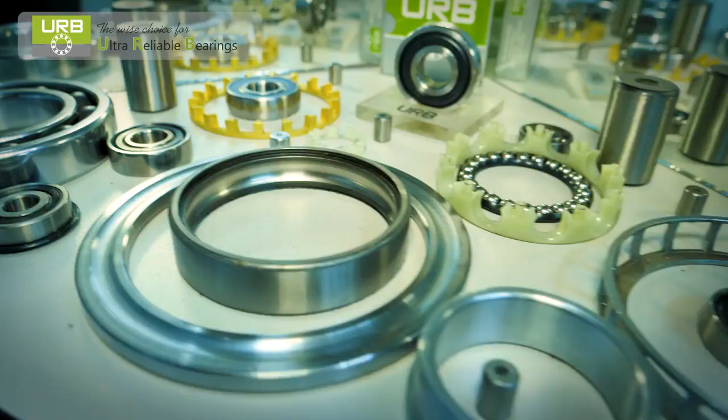Rulmenti Barlad is one of the largest manufacturers and suppliers of bearings and bearings-related services in Southeast Europe. It has over 60 years of experience in the global market and has developed a reputation for innovation and quality. The company produces and distributes a complete range of products and bearings under the URB brand.

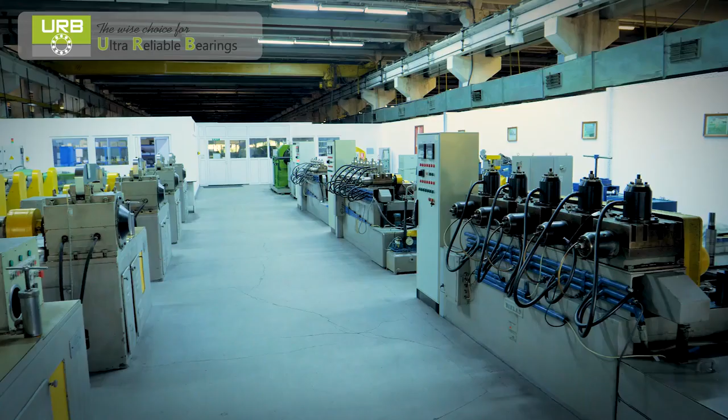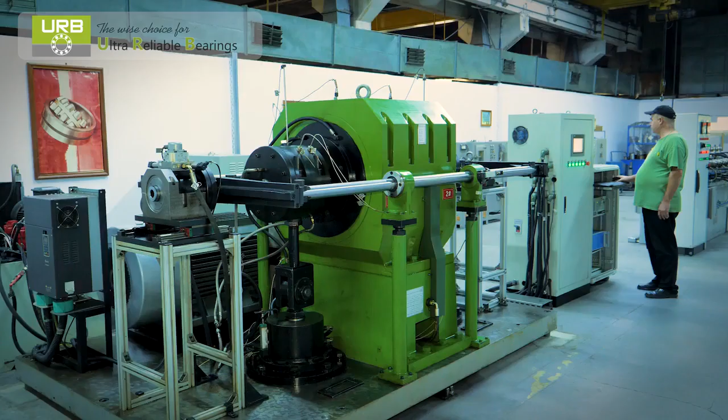The production process starts in the research and development department, where bearings are designed, analyzed, and introduced into simulation sequences with the use of various specialized software like ANSYS, MESYS, or Creo Parametric. Rulmenti Barlad also has a bearing testing laboratory that includes single post test stands and multiple post test stands in order to conduct multiple types of standard tests: durability, startup, friction, and grease loss tests.

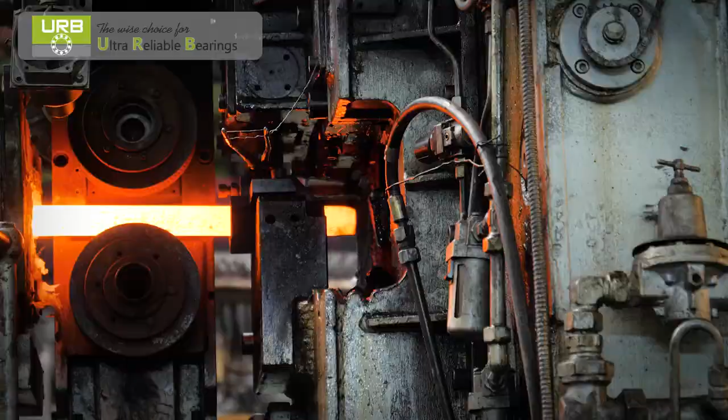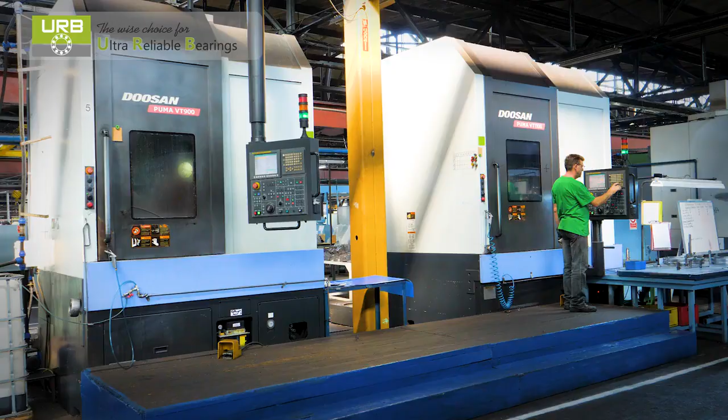The chemical composition of the raw materials and bearing components is analyzed in a dedicated laboratory. The forging process is carried out on forging lines and also on rolling mills equipment. The primary heat treatment is carried out on new and upgraded annealing lines and monitored by an advanced online system. The forged rings for the bearing components continue the process by turning operations on different types of lathes according to the design and size of rings.

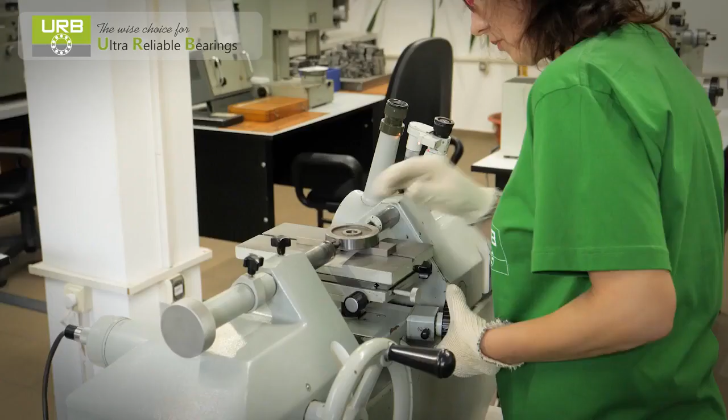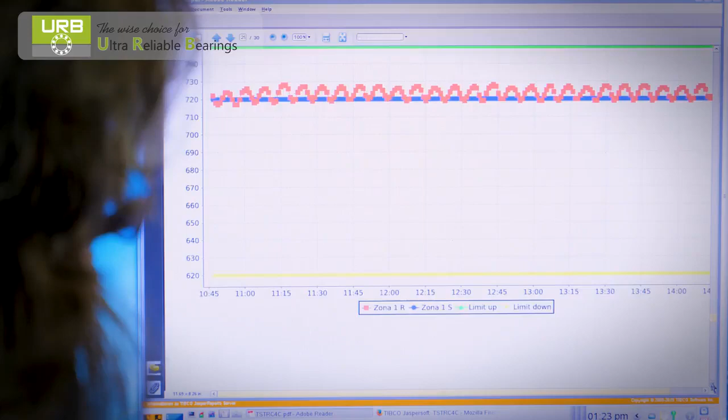Precision measurements and checks of bearing components are carried out on different equipment types: length measuring machines, industrial microscopes, and profile projectors. Secondary heat treatment is carried out on production lines with electric heating and automatic operation. Also, the line is equipped with process computers and an online monitoring system of the treatment process, which have the capability to continuously check the process parameters for each product or process part and to save and archive the data and parameters of the heat treatment process.

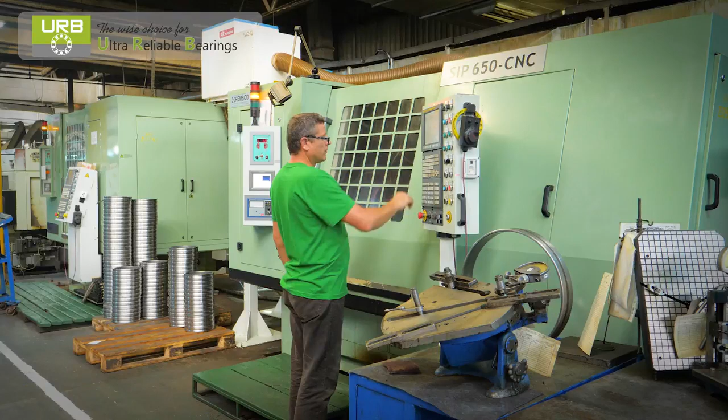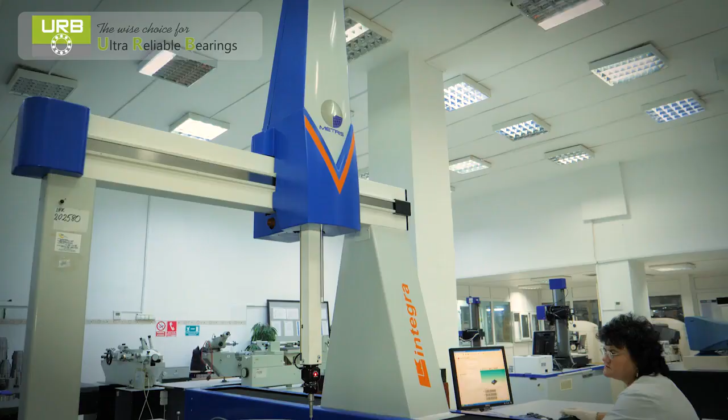The grinding process for bearing rings is carried out on lines of grinding machines or on individual CNC or modernized grinding machines equipped with in-process control devices that ensure continuous checking of the ring's parameters. The 3D coordinate measuring machines and the universal measuring machines provide high precision and accurate measurements of lengths, diameters, threads, and angles of the tested parts. Before the bearings assembly process, all bearing components are dimensionally and geometrically checked on passive control devices.

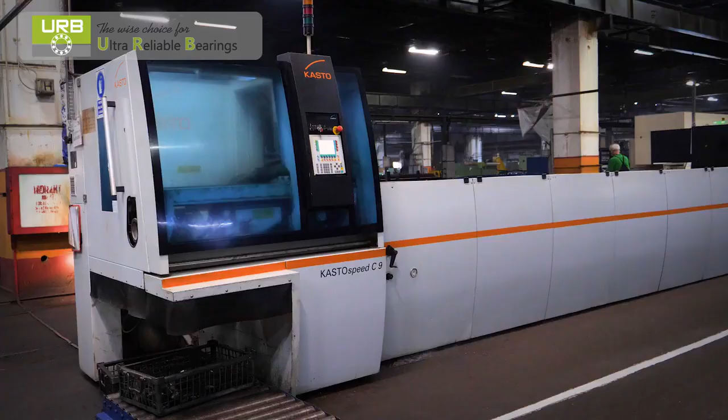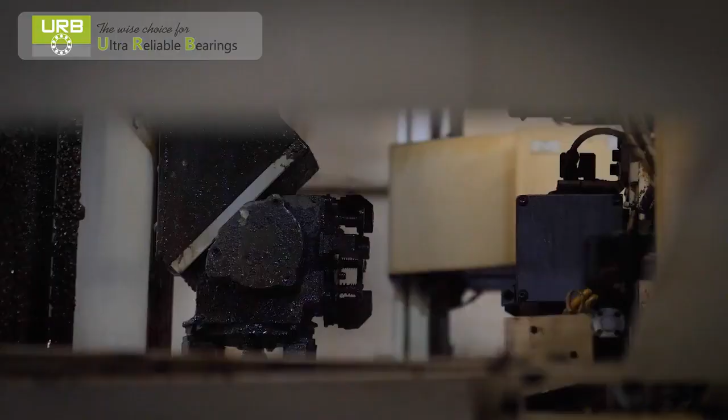The roller manufacturing process is carried out on press machines or CNC lathes and continues with grinding operations at the end sides and rolling surfaces on grinding machines simultaneously. The secondary heat treatment of the bearing rollers is carried out on upgraded hardening and tempering lines, equipped with process computers and an online monitoring system for continuous monitoring of the heat treatment process.

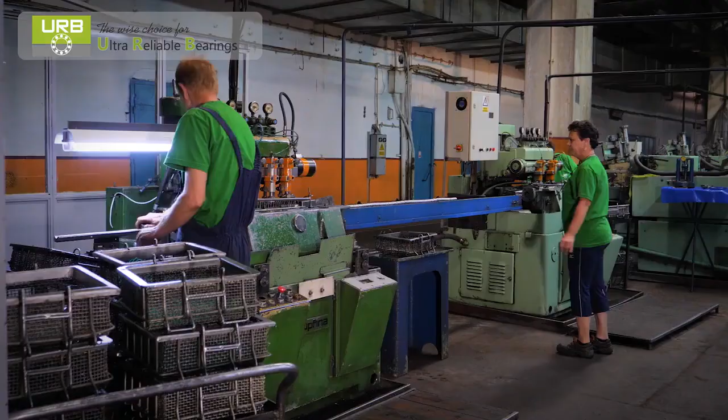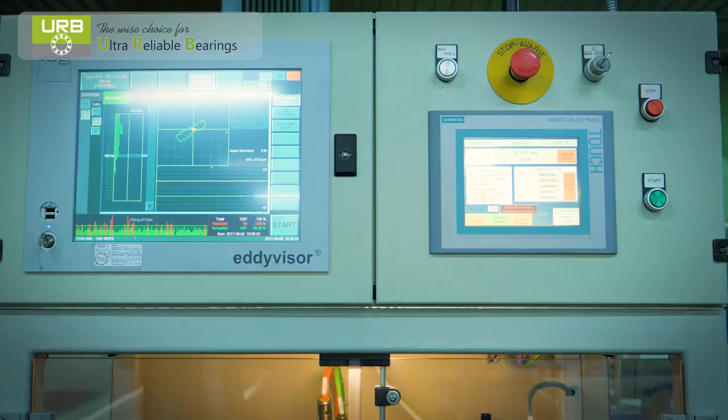The grinding process for bearing rollers is carried out on lines of grinding machines or on individual CNC or modernized grinding machines. For the final inspection of the bearing rollers, non-destructive ultrasonic, eddy current, and magnetic particle testing equipment is used. Roller sorting is done on automatic roller sorting machines according to their diameter and length.

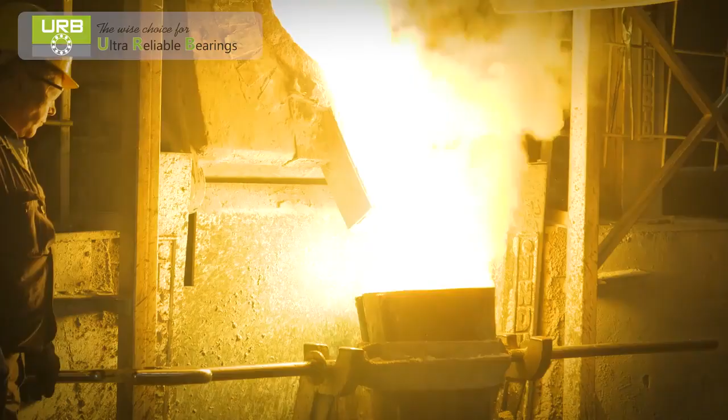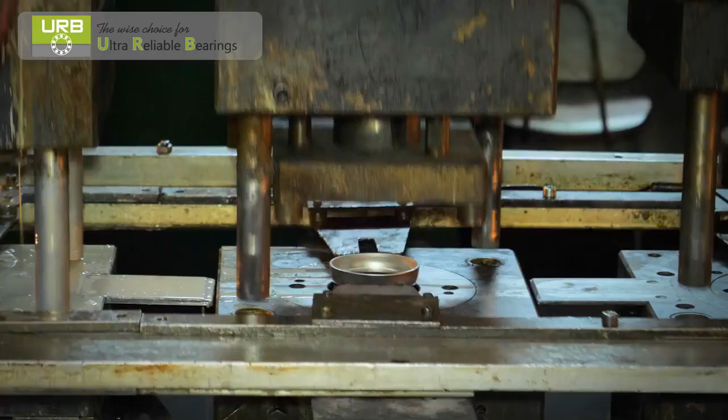The manufacturing process for brass cages includes brass preparation and melting equipment, centrifugal casting machines, and machines for mechanical processing by turning, milling, or drilling. The manufacturing process for steel sheet cages is carried out on multi-post pressing or on individual pressing machines. Bearings assembly is done manually for all bearing groups. After inserting the rollers separately in each cage, the bearing is assembled and radial clearance is checked.

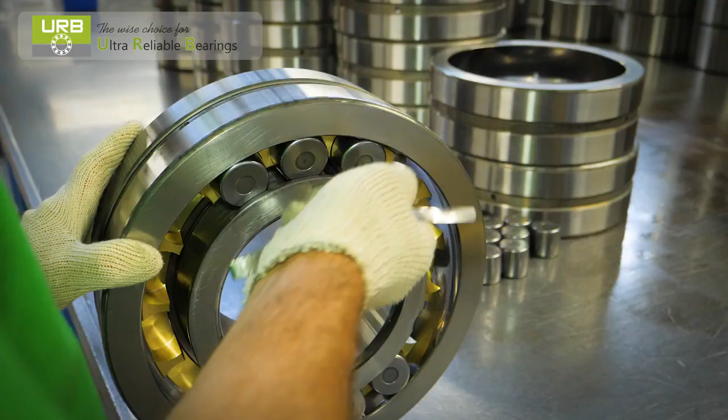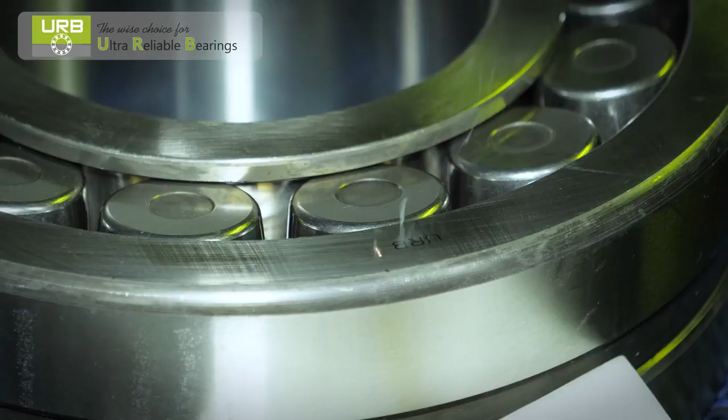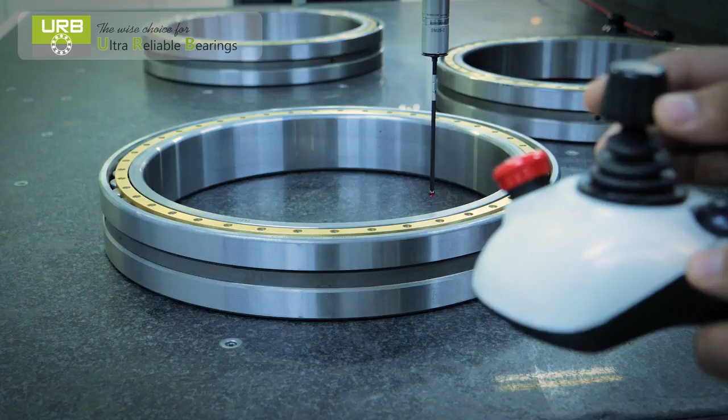After the assembly and final inspection operations, the last stages of the bearing manufacturing process include the marking, washing, and preservation, packaging, and storage of the bearings. An important feature of the bearing marking process consists in the application of the trademark symbol and also the application of an ID code on each bearing for unique identification and to guarantee to the customers the originality of the bearings. The dimensional inspection of the assembled bearings is carried out on a 3D coordinate measuring machine. The packing of the products should comply with provisions, technical specifications, or special customer requirements.

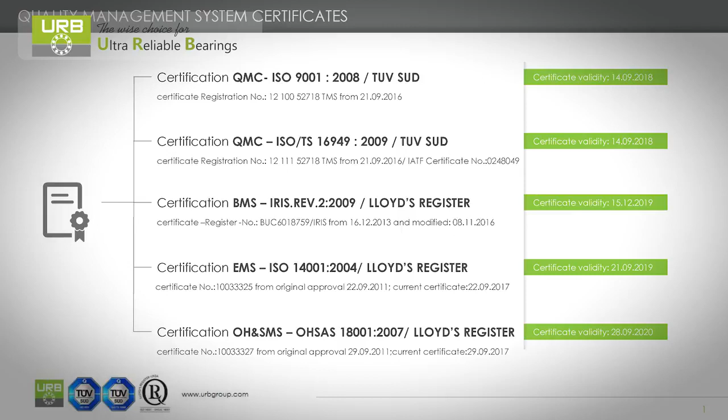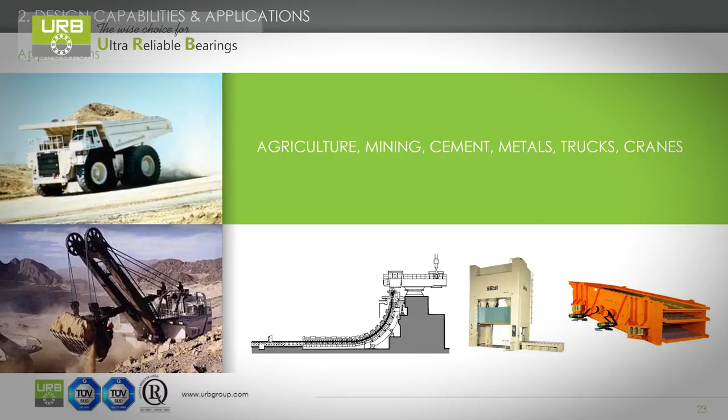The company has implemented and maintains an integrated management system, including certifications according to quality, environment, and occupational health and safety standards. The quality management system is also certified according to specific standards for the automotive industry and the international railway industry. Rulmenti Barlad produces bearings for use in a wide range of fields, from agricultural to petroleum or heavy industry, and has a distribution network of more than 40 countries all over the world, with Europe, Middle East, and North America as main areas of distribution.

Rulmenti Barlad is your reliable and professional partner and URB brand bearing supplier. Our bearings continue to be the wise choice for ultra-reliable bearings.